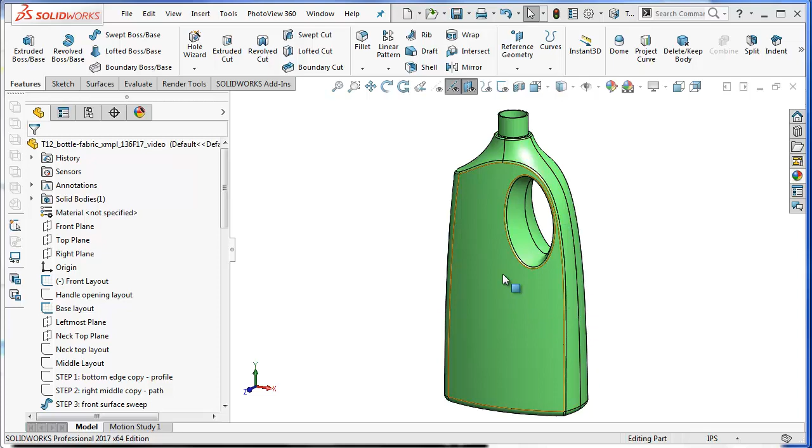What makes this particular bottle an interesting challenge is that a lot of bottles can be formed out of one loft or boundary, and then the rest of the details can be added or subtracted. This one has a side face and neck area that are all blended together as one contiguous surface, and then the front surface and left side wrap around as sort of a contiguous surface as well.

For this reason, we have to build all of the surfaces as separate panels and then knit them all together.

I'll begin the tutorial by showing you all of the layout sketches and planes I used that all the remaining features are based upon. I've rolled back the feature tree to the very first feature, and here we see the front layout. We see the edges of the bottle, the neck area, and the left edge. This edge here is slightly inboard of the outer edge, which represents the forward edge of the front face. This edge is a forward edge of the front face as well.

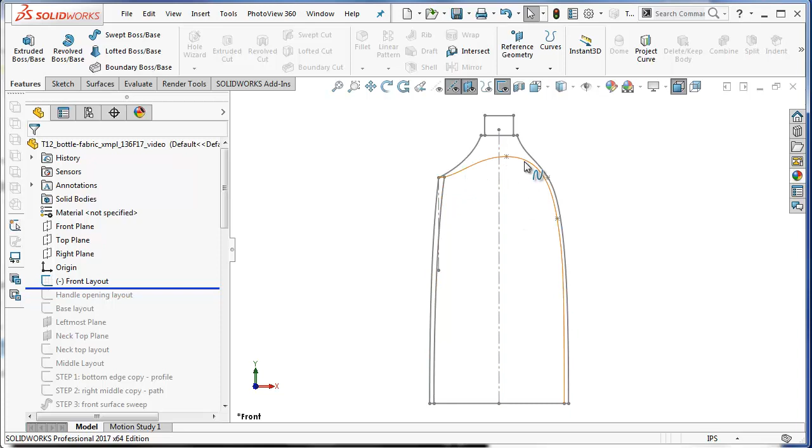The next layout sketch just shows the shape of the handle area, which is cut out of the bottle. And we have another layout which shows the shape of the base of the bottle.

Then I've added a plane to the left of the right plane, which I call the leftmost plane. A plane at the top in the neck area. And a little layout sketch that just represents the top circular shape of the neck area here. And then finally,

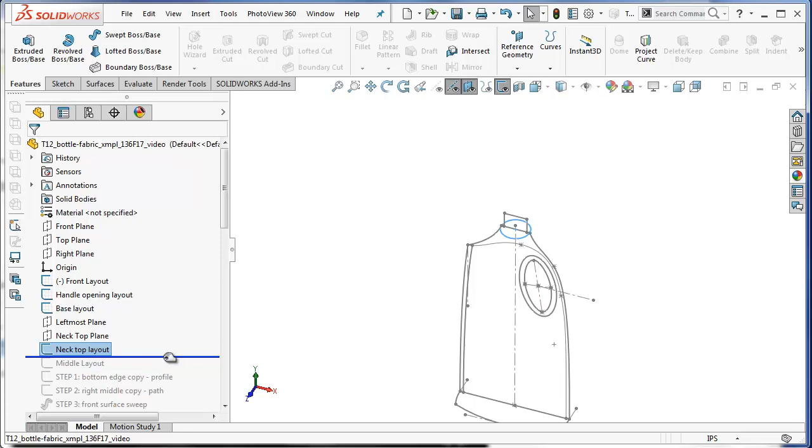I have a layout which is on the right plane, which represents the shape of the bottle right in the center or middle of the bottle.

I'm going to start the surfacing of the bottle by first creating the very front surface. This is going to be done by taking the bottom curve of the base and sweeping it along this middle curve. That will give us a nice gentle compound curve in this area.

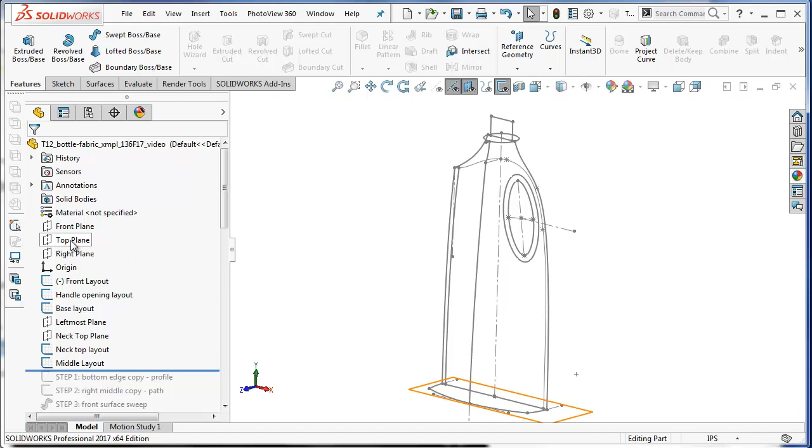So I start that by first making a sketch on the bottom plane, or actually the top plane, and then copying this curve into my sketch using convert entities. That's all I have to do here. I'll close the sketch, and that sketch will become the sweep profile.

The next sketch I need to make is the sweep path, which is going to be copying this curve into a new sketch. So on my right plane, I'll make a new sketch and just simply copy this curve from the layout sketch, and I'll finish the sketch.

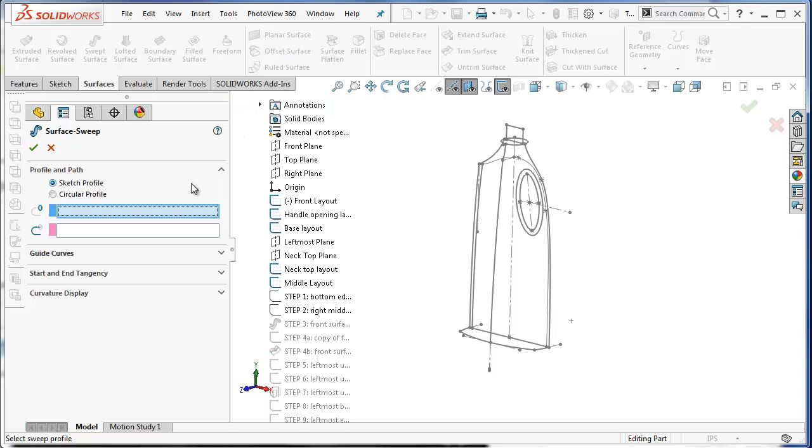Now I can make my surface sweep. So I'll choose the swept surface command, and I'll pick the two sketches that I just made off of the flyout menu. For my profile, I will select the first sketch that I made, and for the path, I will select the second sketch that I made. Here we see the profile, and we'll just go ahead and finish that command.

So here we see our very first surface. It's just a gentle compound surface, and I'll look at this from the front view. We see that it just fits in within the confines of what will become the front surface of our bottle.

It's actually not a bad idea when you copy this sketch down here to stretch it out just a little bit to either side, so that when you trim this surface, you'll get a good clean trim down at these corners. The next step will be to trim this surface so that it matches the shape of the front of the bottle.

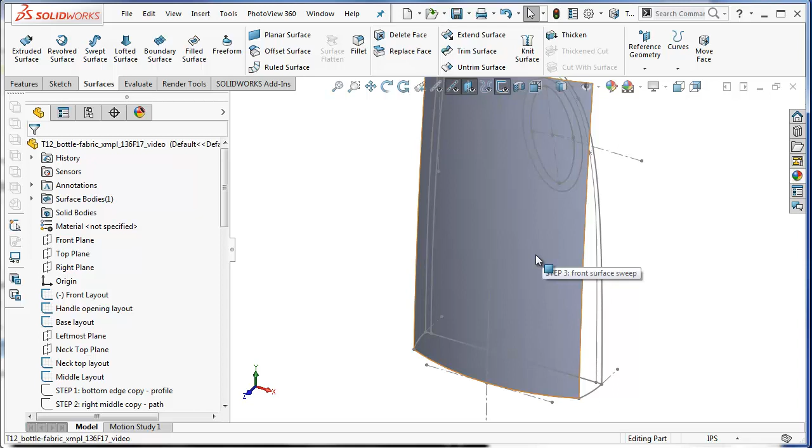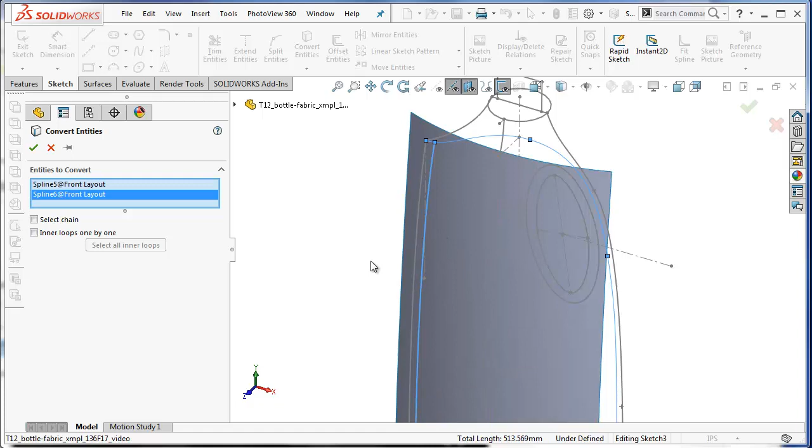To do that, I'm going to copy this edge here from my front layout, and I'll go to my front plane and make a new sketch. I'm using convert entities. I'll copy this edge and this edge from my layout sketch. And I need to just do a little trimming here, so I'll trim off this excess little piece.

Then I can go to my surfaces again and say trim surface. The sketch that I was working on should just automatically pop into the trim toolbox. I'm going to actually keep this middle section here, throwing away these outer bits. Finish the command. Now we've got a front surface that matches the shape of the bottle.

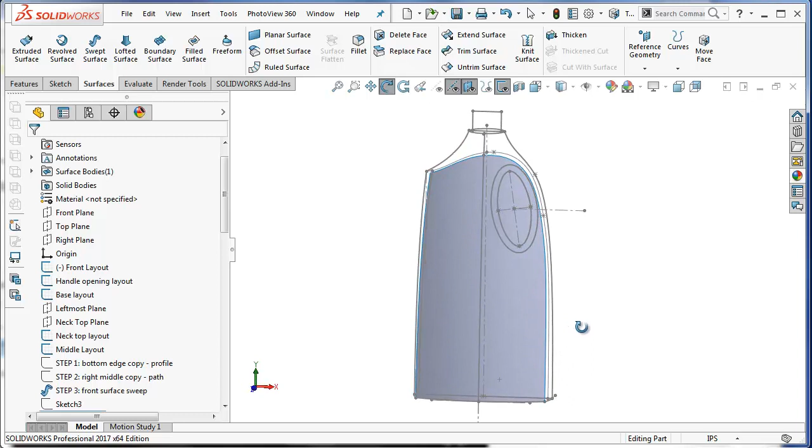Our next step is going to be to build the left side face of the bottle, and to do this we're going to use a boundary surface. Boundaries require 4 edges, and we are going to have 1, 2, 3, and the 4th edge will be here. The only problem is that we have nowhere in our layout sketches the curve that's going to connect this corner to this corner.

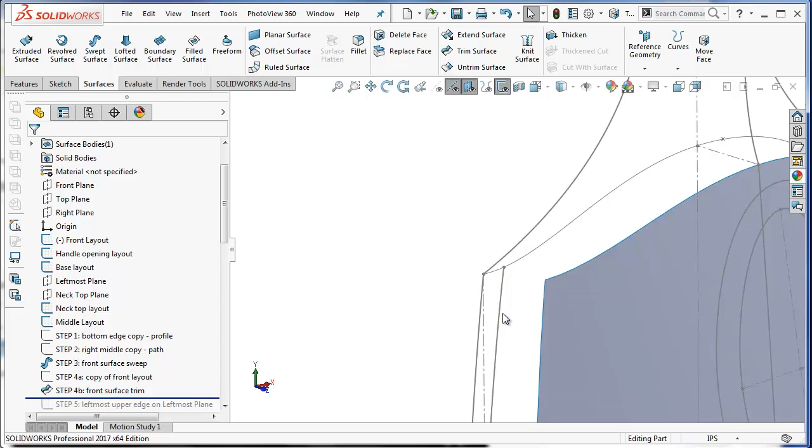That's a 3-dimensional curve. It's going to curve slightly upward in the left-hand view, and curve in this direction in the top view. So there's 2 ways to accomplish this before we make the boundary. One is to draw 2 curves in 2 different planes and project them together, or the other is to make a 3D sketch and just draw a 3-dimensional spline from this point to this point.

I'll show you the projected curve method first. I'll look at the left side of the bottle, and on the leftmost plane I will draw a sketch, and I'm going to draw a simple arc. It's going to start at this point, come off into this area, and I want to make sure that it's dished downward. And I'm going to add a construction line that is horizontal.

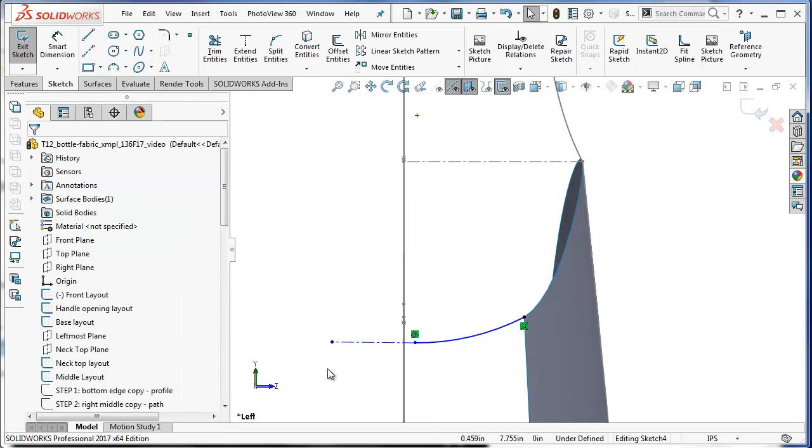These are automatically tangent to each other now, if they aren't, add a tangent relation. I'll rotate the view and make sure that this point and this point are coincident with each other. I also need to make sure that this tangent line is horizontal, which apparently it is not at the moment, so I'll just click on that and add a horizontal relation. Now we've seen our curve go to black, which means it's fully defined. You can see it has just a very subtle upward curve to it. So I'll close this sketch.

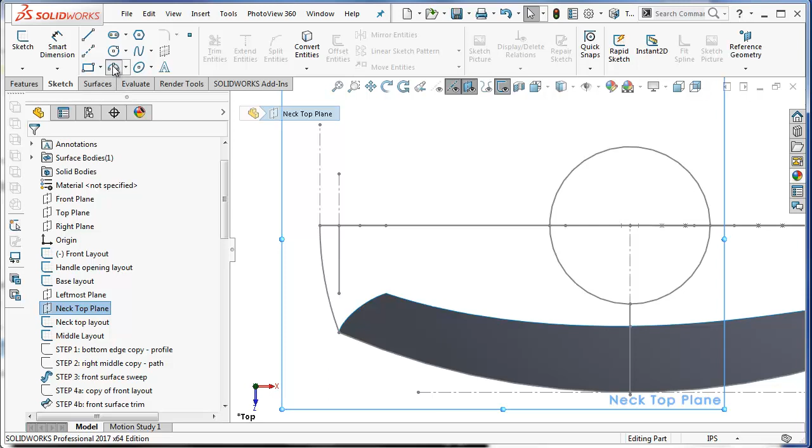Now I'll work on the top view of the very same element, which will be projected with this sketch. So looking at my top view, I'm going to sketch on my neck top plane, and once again I'm going to make a 3-point arc. I'm going to attach it to this point here, and I'll just sketch out in this area to start with. I'll make sure that this is bowing off to the left side.

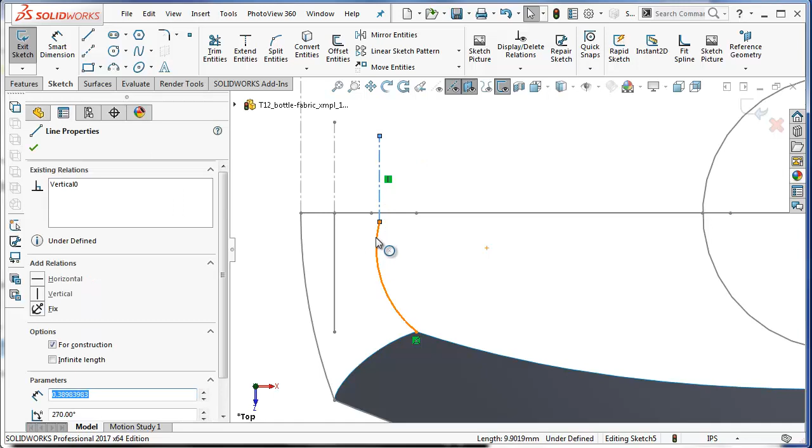I will make a vertical construction line that will be used for tangency with the curve, so I'll make these 2 tangent to each other. And I want to make this point and this point coincident.

Now if you're wondering why I'm adding these construction lines, it's because I want to make sure that when I make one half of the bottle and then mirror it to the other side, that I have a seamless blend between the original side of the bottle and its mirrored twin. To do that, I have to make sure that any curves that I draw that are going to go into the mirror plane, which is my front plane, have to go straight into that mirror plane or normal to it.

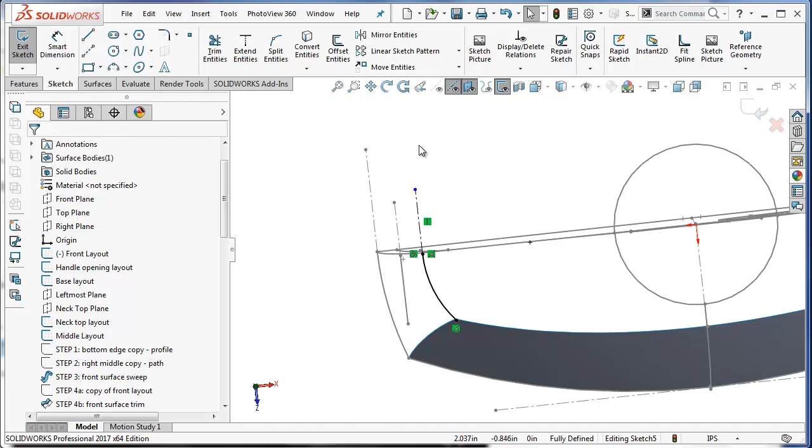So adding this construction line, which is vertical in this case, which is going normal to my front plane, will guarantee that when I make this projected curve with the curve I just previously drew, that the projected curve will also be going normal to the front plane, so that when I mirror this surface here, it will seamlessly blend with its twin over here. So I'll just finish this sketch now.

What I want to do is take the 2 sketches that I just drew, this one and this one, and make a projected sketch which will be a 3-dimensional sketch that will go from this point to this point in three-dimensional space. So to do that, I go to Insert, Curve, Projected. I use the Sketch on Sketch option, and I just click on these two sketches, and we see the highlight of these sketches.

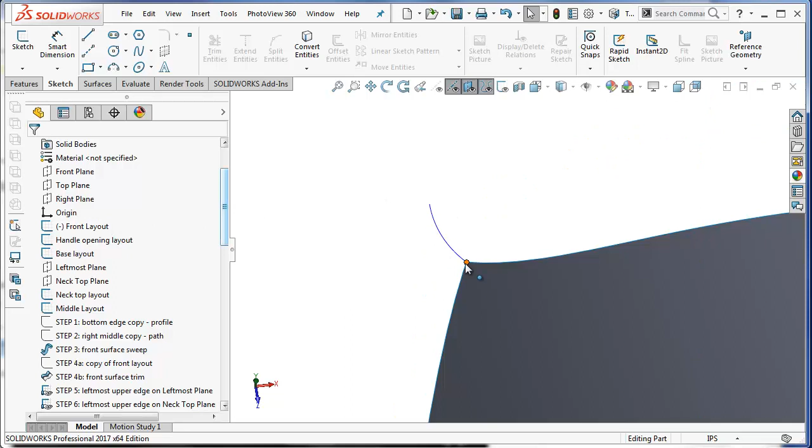Turning on my curves and turning off my sketches, now I can see what that curve looks like. So it's going from the front plane to this point in 3D space, and from the top view you see that it's curved like the top view sketch that I drew, and from the left side view we see that it's curved upward like the left side curve that I drew. I mentioned there was another way to do this, so I will just quickly demonstrate that.

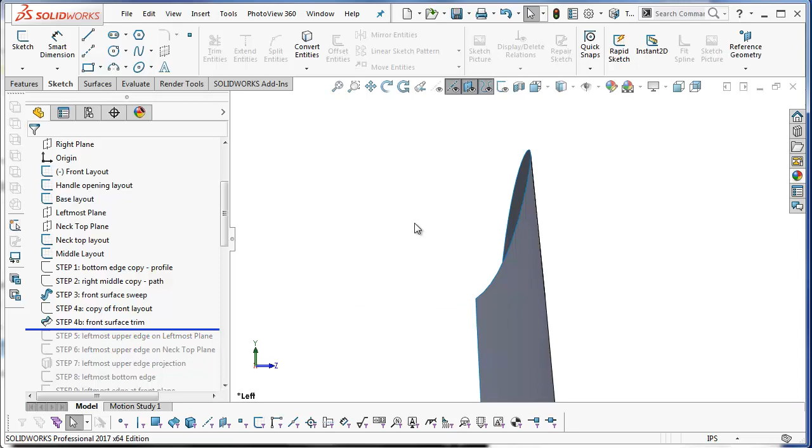I'll roll back my feature tree, turn my sketches back on, and I want to draw a three-dimensional curve in 3D space going from this point to this point. So going to my 3D sketches, I will first select Spline, and I'll click on this point in my layout sketch, and I want to make sure that I grab this point, which is the corner of my front surface. Hit Escape, and what I want to do is view this directly from the left side.

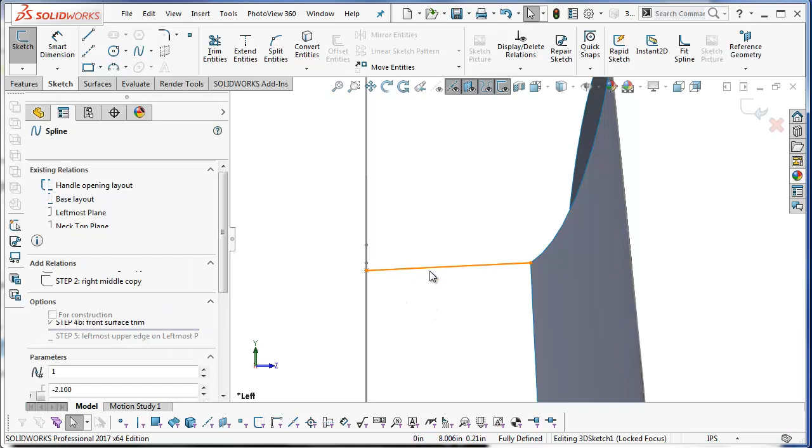When viewing this from the left side and making adjustments, I should not be affecting the shape of this curve when viewing it from the top view. So I'll click on this and grab one of the control handles, and make this control handle be along the Z direction, which is coming directly out of my front plane, also my mirror plane. Selecting along Z, we see a nice gentle upward curve like before, coming straight out of the mirror plane.

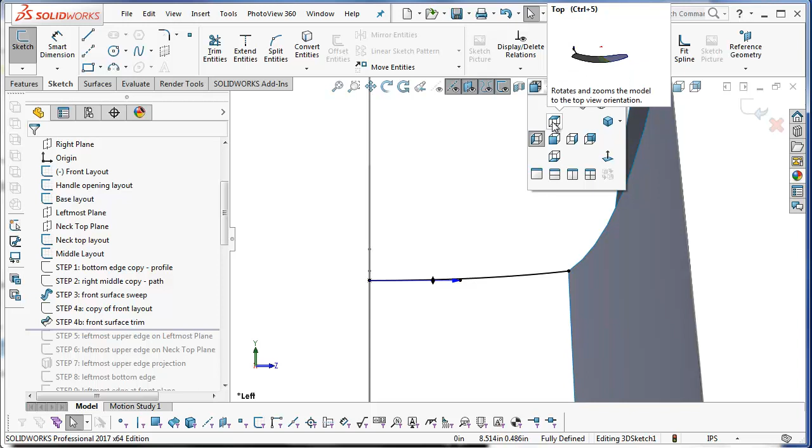Now looking at it from the top view, we see it's still coming straight out of the mirror plane, with a nice gentle curve going right to this point, bowing to the left like we need it to be. So I don't think I need to make any changes in this view at all. We'll look at this off axis to see what it looks like in 3 dimensions.

If I roll forward to the projected curve that I made, we see it's not too different from this 3D sketch. The two are practically on top of each other, so you might find that to be a less laborious way of making this curve from this point to this point.

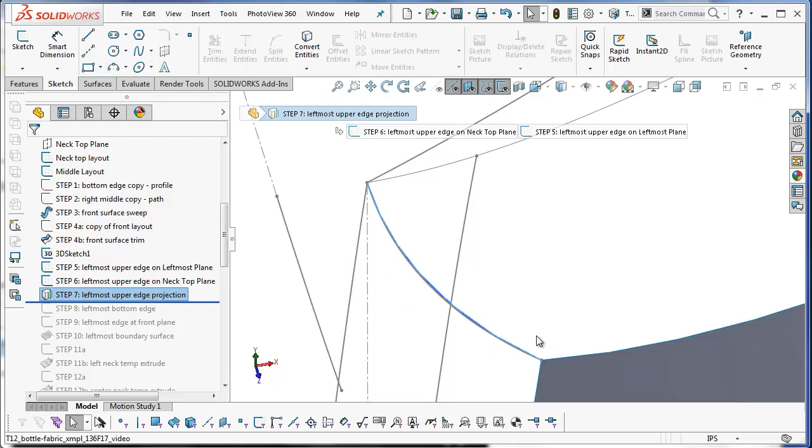I'm going to stick with the original projected sketch that I made for the rest of this tutorial. So now all we have to do to make our boundary is copy some elements from the layout sketches for the remaining 3 edges of the boundary. We need to copy this edge here and this edge here, but we don't actually have to copy this edge here - we can just attach our boundary directly to the edge of this surface we made earlier.

So selecting our top plane, we will make a new sketch, and just copy this edge from the base layout, then simply finish the sketch. Then on our front plane, we make a new sketch again, copy this edge from the front layout using convert entities, and finish the sketch.

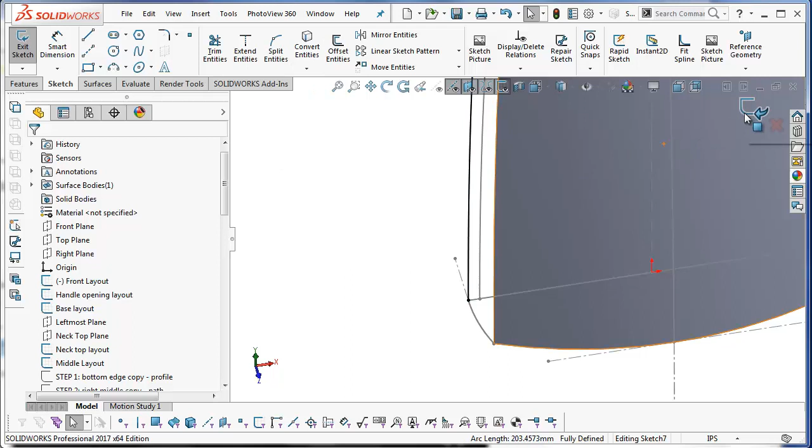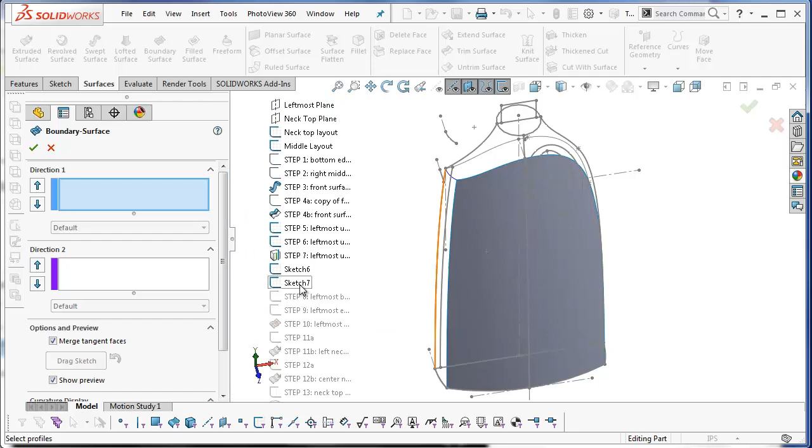Now we should have everything we need to make this boundary on this side. So I'll go to Surfaces, Boundary, and for direction 1 I will select the 2 long edges of the boundary. One of those edges is the sketch I just created; the other edge is this almost vertical edge of my front surface.

You notice that what's happened is that this has gotten twisted. That's because I'm trying to join a pink dot to a green dot when I want green dot to green dot. So all I have to do is untwist this by selecting either one of these in my direction 1 box, right click and say Flip Connectors. Now I've got pink dot to pink dot and green dot to green dot.

So now going the other direction, in direction 2, I'll activate that box. I will select this curve that I made earlier, and down at the bottom, I'll select the little sketch that I made just a few minutes ago.

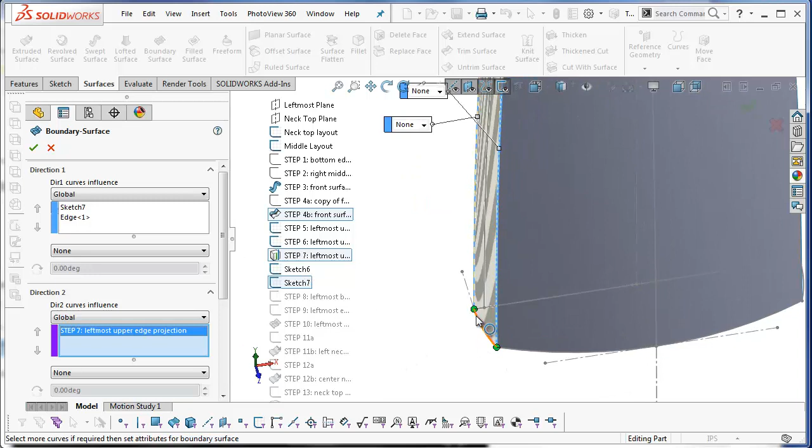Now what I want to make sure is that later when I mirror the bottle, this new surface is going to go normal to my mirror plane so that I get a smooth, seamless blend when I mirror the twin to this side. That means this edge right here, which is at the mirror plane, needs to be changed to normal to profile. And I finish the boundary.

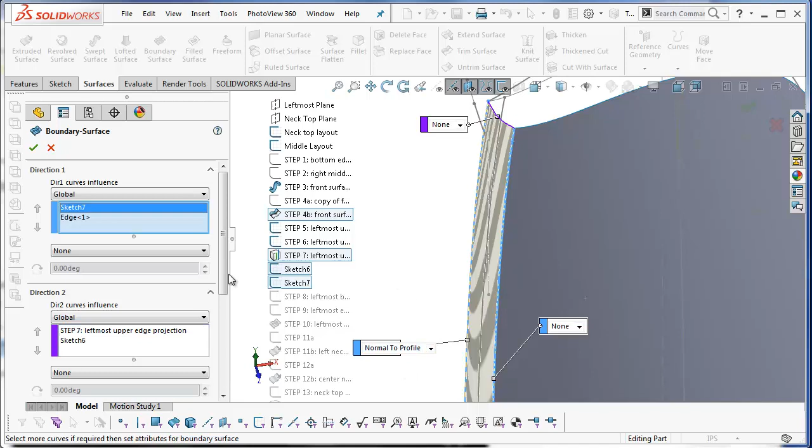This is what we have so far. The next step is going to be to build this neck area of the bottle. The neck area sort of starts on the left and blends all the way down to the right side of the bottle. If we try to build this as one giant surface that starts up here and falls down the side of the bottle, I think it's not going to be a very good looking surface.

So what we are going to do is build one surface here and later build another surface attached to it for the right hand side of the bottle and the right hand side of the neck. No matter how we slice the surface up, we're going to end up with an odd number of edges. So if we build this corner here, we will get 1, 2, 3, 4, 5 edges, which suggests we should be using a fill surface.

If we use a fill surface, we want to make sure that the fill surface is going normal to profile at the mirror plane. So this is the edge that's going to be at the mirror plane, and unfortunately there is no normal to profile option on fill surfaces. So what we have to do is extrude a temporary surface from this edge that we can attach the fill surface to.

We also need to copy 1/4 of the neck area here, and also we want to make sure that the fill surface is going normal to profile on the right hand plane of our bottle. And again, we don't have a normal to profile option, so what we have to do is copy this edge and temporarily extrude a surface in this direction that we can attach our fill surface to.

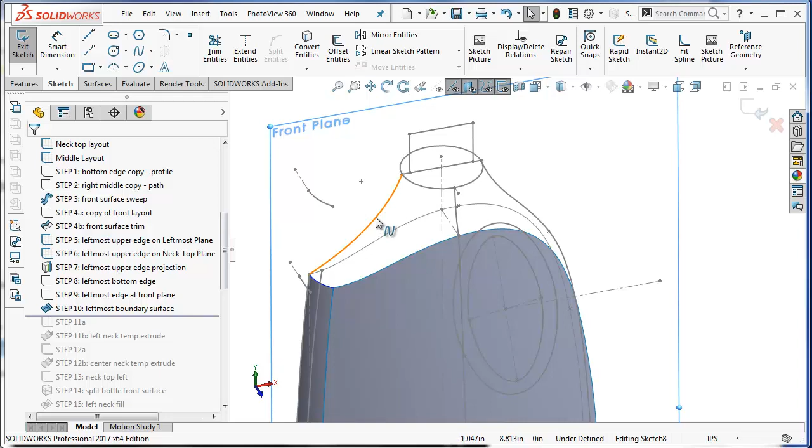So sketching on my front plane, I will copy this edge using convert entities, and then I will just extrude this in the -z direction. The extrude distance is not important, it's arbitrary, so I'll just leave it at 0.1 inches, and I'll flip the direction so that this is going off in the -z.

We have our temporary surface here. This is what we're going to be attaching one edge of the fill surface to. So our next step is going to be to build the temporary surface that's on the midline of the bottle, and we're going to attach the fill surface to that.

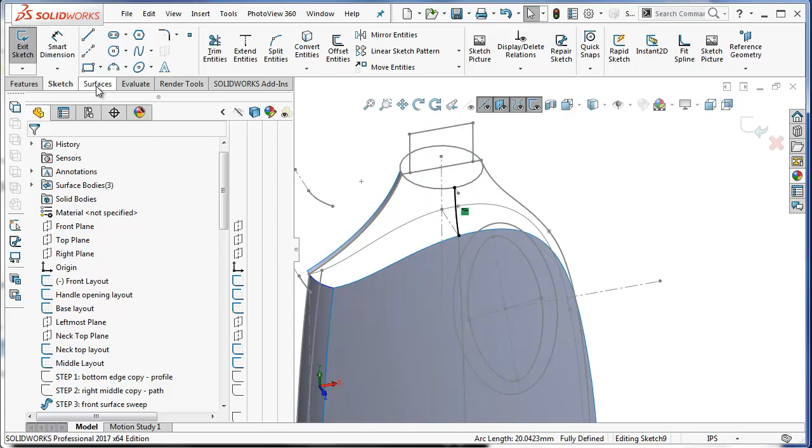So on our right plane, we make a new sketch, and all we have to do is copy this edge here, again using convert entities, surfaces, and extrude that, and we want to make sure that it's going off to the right. So now we have 4 of the 5 edges that we need. The last edge is just going to be this quadrant of the circle for the neck.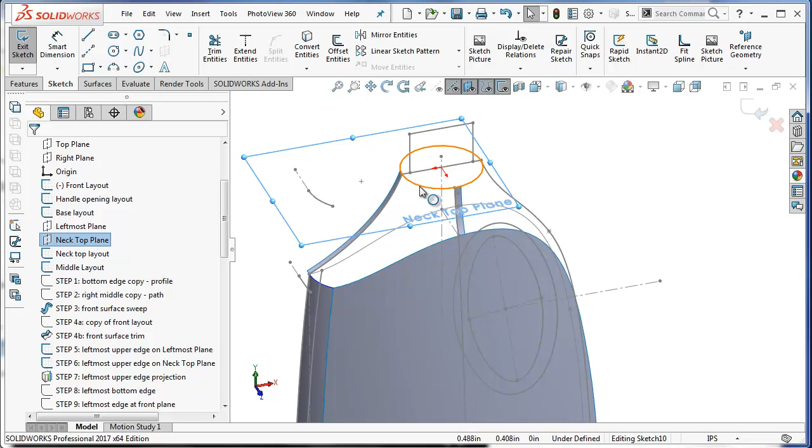So on our neck top plane, we will make a new sketch. We will copy the entire neck layout. We need to get just 1/4 of this, so what I'm going to do is draw a construction line from the origin out in this direction and make sure that this is going vertical, and another construction line going off to the left, making sure that this has a horizontal relation, and then I can just use my trim entities.

Turn off my sketches for a moment, and here we see we'll just get 1/4 of the original full circle. Now finish that sketch.

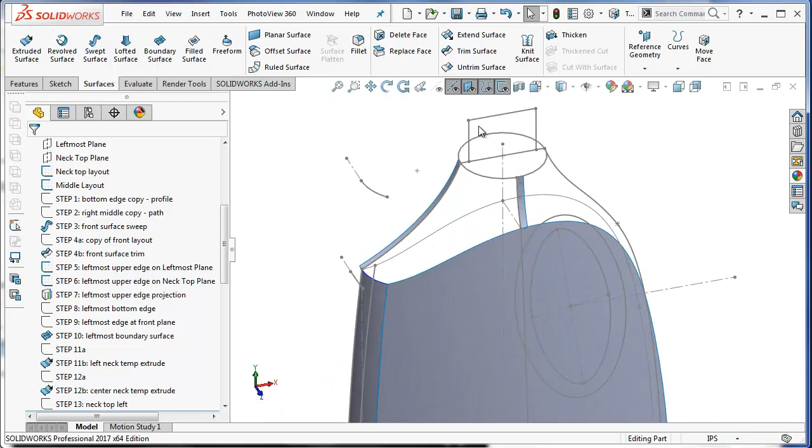Let's turn off our layout sketches and show the sketch that I just made. So we've got 1, 2, 3, 4, 5 edges.

The only trouble is that when you use the fill surface, you want the edges to all connect together from one end to the next. We're going to be using this edge of our front surface for part of the fill, but this edge is going past this edge here, and that can often cause the fill surface to fail. We need this edge to end right at this point.

So what we can do is split this front surface so that this edge ends right here. We'll do that using the right-hand plane. So we'll say Insert, Curve, Split Line. We're going to use the intersection option.

We're going to intersect the front surface with the right plane. So our first box is going to be the splitting surface, which is the right plane. The second box then will be the surface being split. Here we see a preview of the split line.

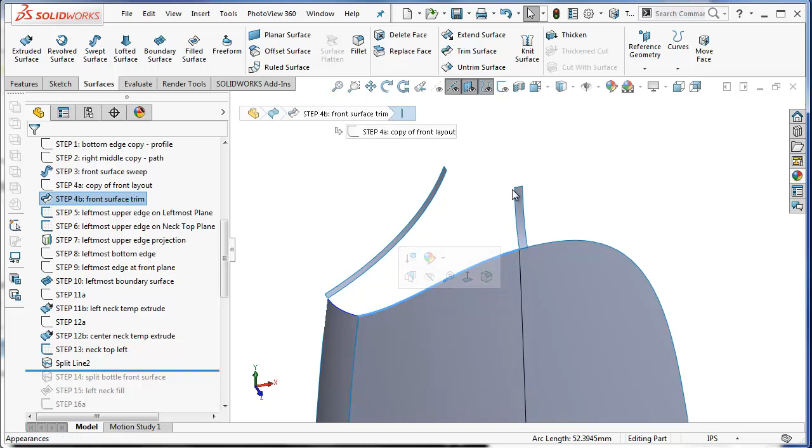Now if I click on this surface, you see the surface is split into two faces. And that means that this edge is going to end right at this edge, which is exactly what we need. We now have everything we need to make our first fill surface.

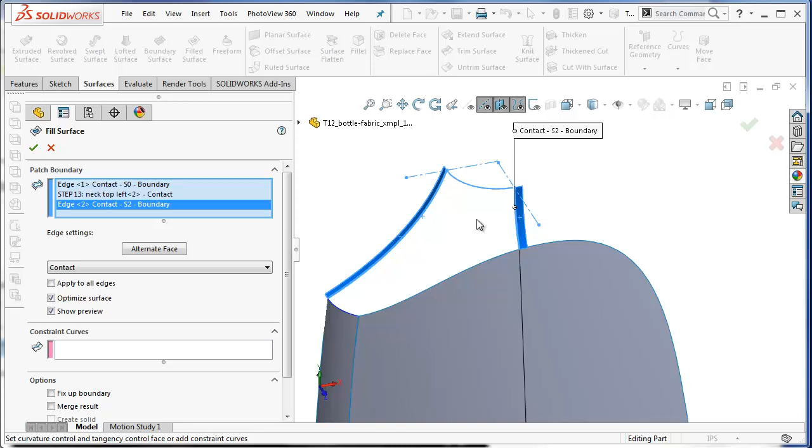I'll turn my sketches back on, and now I can go to Filled Surface, and my boundary is going to be this edge, this sketch, this edge, and finally this edge. Make sure that you have your curves turned off so that you're grabbing the edge of a surface rather than a curve or a sketch.

Now I need to make a few adjustments to my tangency controls. This edge here, we want the surface to go straight into the mirror plane. We've attached this edge of the fill to this temporary edge here, this one I'm highlighting, and we want to change this to tangent. That's the same in this case as going normal to profile with a boundary surface, because this is going tangent to a surface which is normal to the mirror plane.

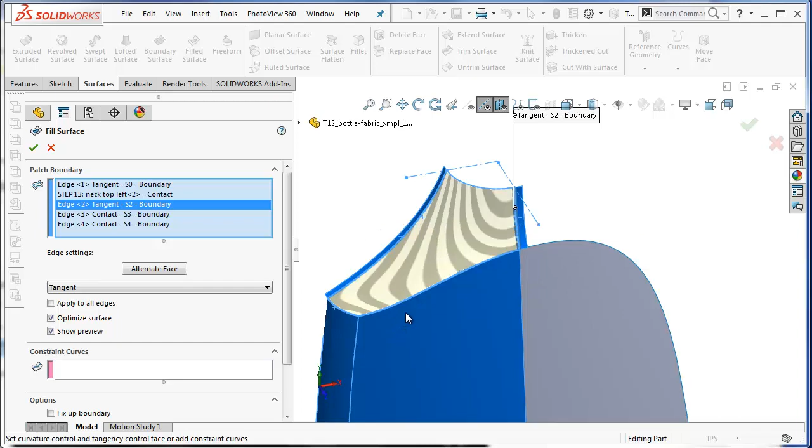This edge here can be contact. This edge here also we want to go normal to the mirror plane, which in this case is the right-hand plane, so I'll change this to tangent. We see some subtle changes to the surface in the zebra stripes, and this edge here can remain as contact. There is our first fill surface.

Now I'm going to hide this temporary surface. I don't actually need it anymore. And now we are ready to build the right-hand surface of the bottle. That's going to fill in this area here from the left side of the neck all the way down to the right-hand side of the bottle. This is again going to be a 1, 2, 3, 4, 5-sided surface, which means that once again we need to use a fill surface.

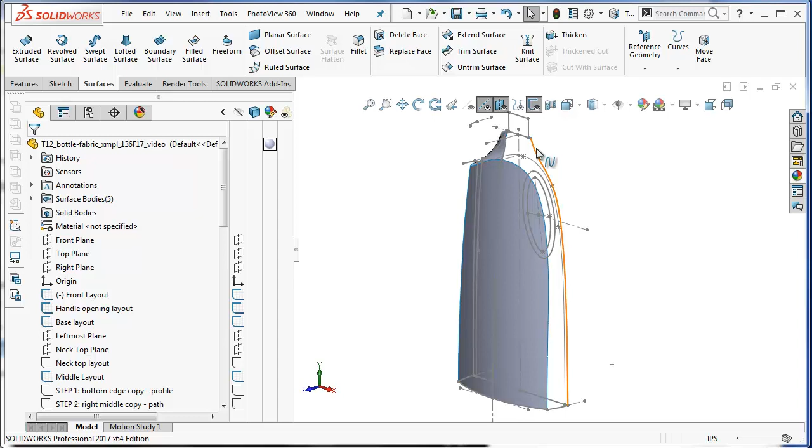The only additional temporary surface that we need is going to be on this edge here where the mirror plane is located. We don't need to build a temporary surface here because we're going to attach this new surface directly to the fill surface that we just created.

So making a sketch on our front plane, I will just copy this edge here from the front layout, and I will extrude this an arbitrary dimension. I want this to go in the negative Z direction, so I'll just flip my direction 1. 0.1 inches is fine, and just finish that surface.

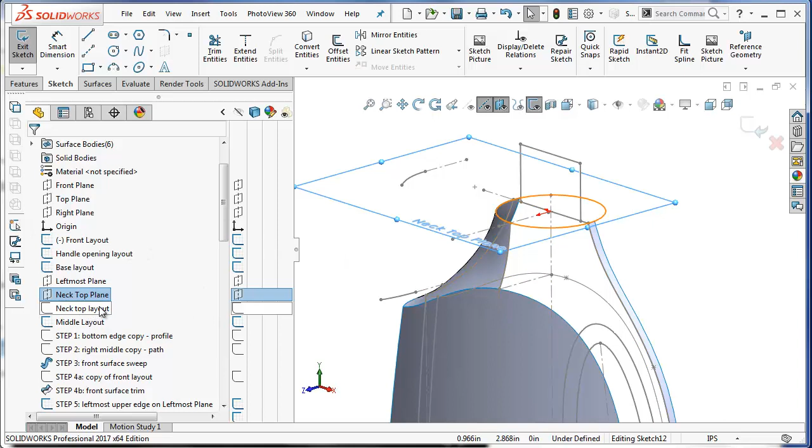I also have to make this quadrant of the neck area, just like I did before. So on my neck top plane, I will copy the neck top layout. I'll just do it straight from the feature tree here. So I will convert entities. I once again get a full circle here.

And again, I want to add a horizontal line here and a vertical line here. Turn off my sketches. I'm going to just utilize this quadrant here with the trim entities, and I'll trim away this portion here.

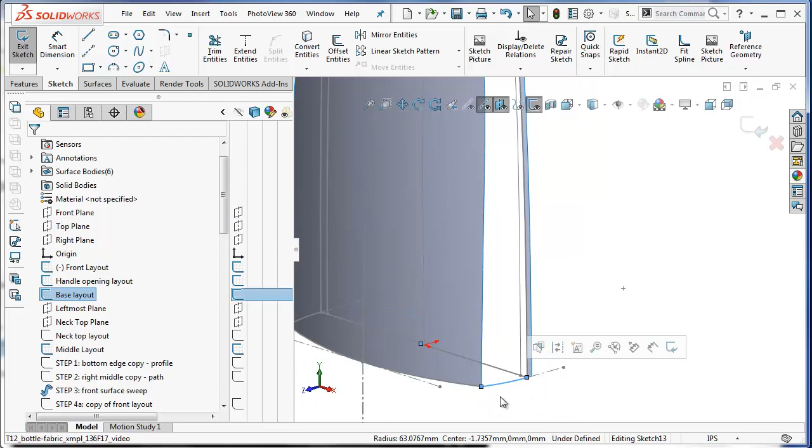The last thing I need is just a sketch for this bottom corner of the bottle. So again, turning on my sketches and looking at my base layout, I will make a sketch on my top plane and just copy this entity here, convert entities, close the sketch.

Now we've got everything we need to make this fill surface. I'm going to hide my front layout, and I'm going to make sure that this sketch here is activated. And we will now make our fill surface.

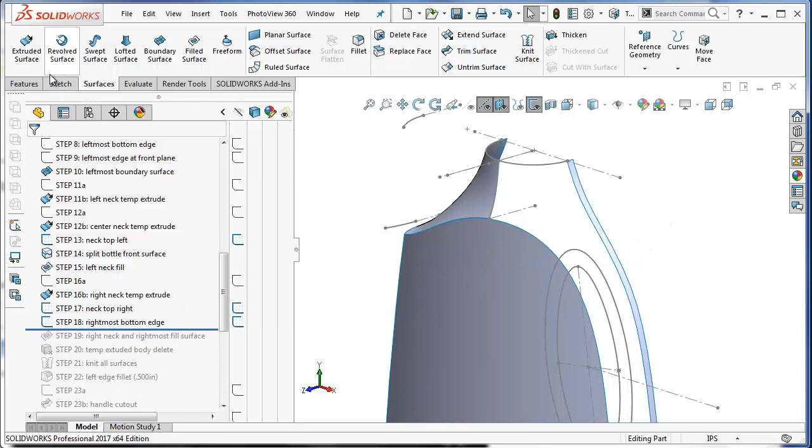I'll click this edge here, this quadrant of the neck. This edge of the previous fill surface I made. So you might want to turn off your sketches to make sure you're grabbing the edge of the fill surface and not a sketch. This edge here that was part of the split front face, so you see this edge is ending right here.

And then down below, I'll grab the sketch that I just copied here. So I will go to my flyout menu to get that.

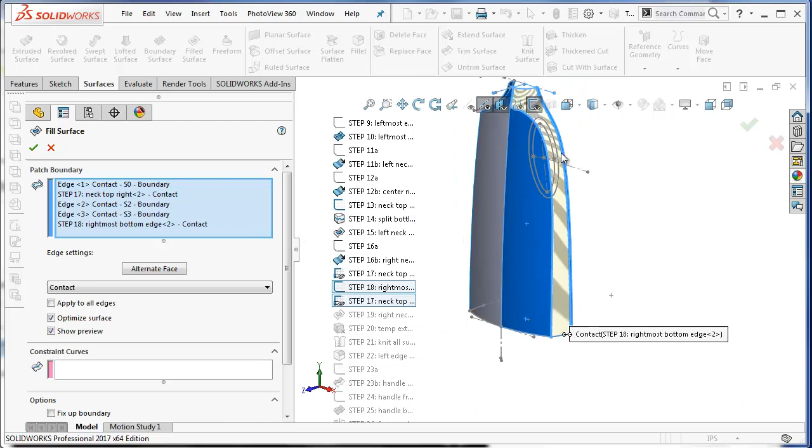Before I finish, I want to make sure that this fill surface is going tangent to this temporary surface, which will make it normal to my front plane, which is also my mirror plane. So that's this edge here. Change that to tangent.

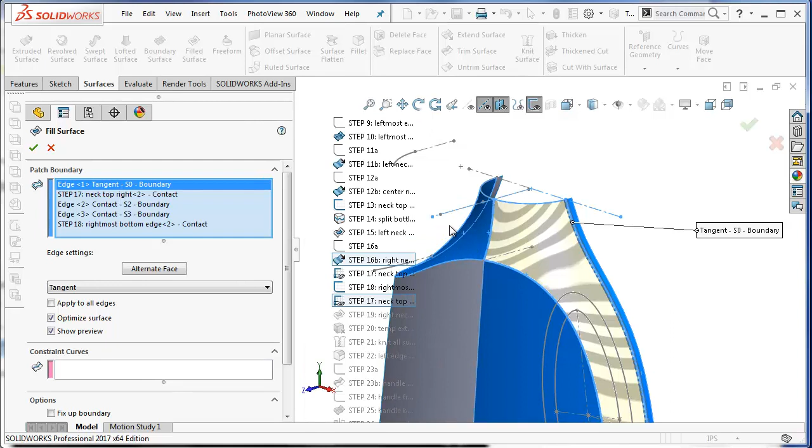And I want this smoothly blending to the left side fill surface here, so I can try a tangent or I can try a curvature. I'm going to try a curvature. That's this edge right here. And I'll say curvature, and it seems like it's going to work, so I will have a nice blend here.

Finish that. Let's turn off our sketches. And now we can see how this is nicely blended in with the neck, and if I turn on my zebra stripes, we see that there are smooth zebra stripes going through this joined edge here. Actually, common edge would be a better term to use here. These are not joined or knitted together just yet.

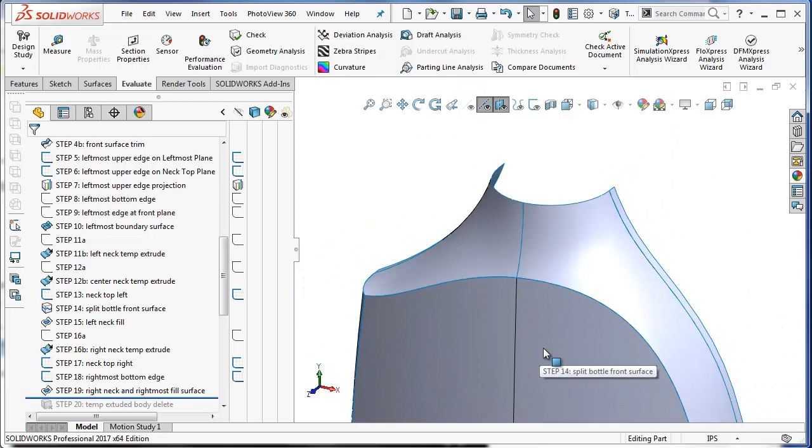So I'm going to do a little bit of housekeeping right now. You might recall that we've used 3 temporary surfaces which no longer are needed. So I can just go into my surface bodies.

And I know this is a temporary surface here, so I'll just find that surface in my surface bodies. That's here. Right click, delete, keep body. I'll make sure that delete bodies is active.

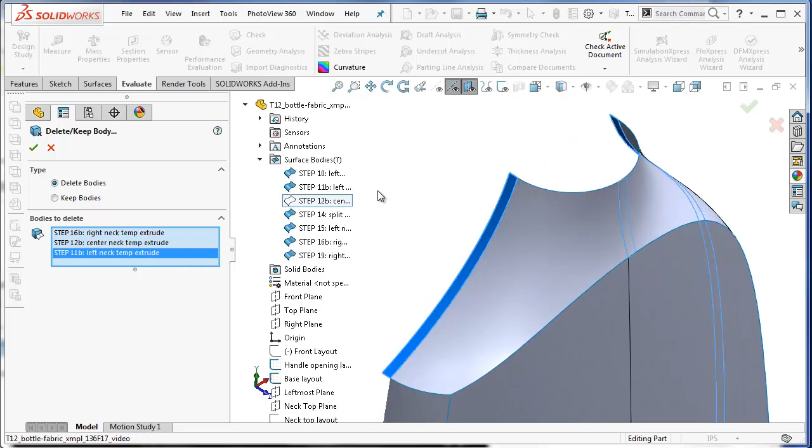I'll open the surface bodies again in the flyout menu, and I'll select this surface which had been hidden to add it to the list. I'll get rid of this body too. Actually, I can just go ahead and select it right from the graphics area. So I've selected 3 bodies to be deleted, check mark. Those are now out of my model.

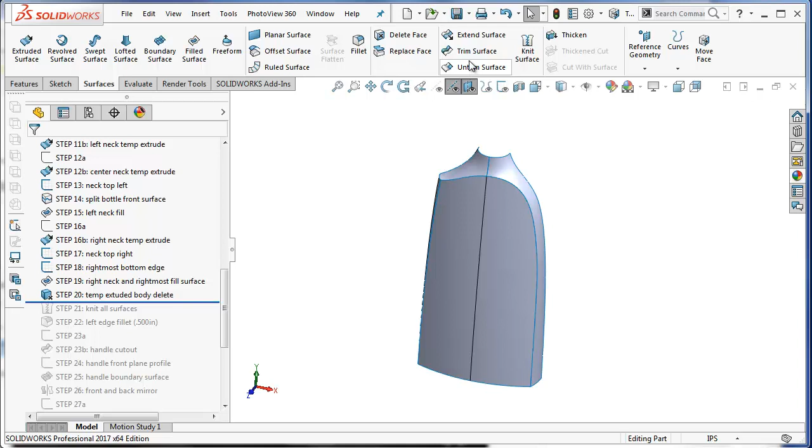So we've gotten most of the hard stuff out of the way. Now we can knit all the surfaces together that we've created thus far. Going into surfaces, knit, and we've got 1, 2, 3, 4 surfaces to knit together. These are now a single surface body, and you can tell they're knitted because the lines which had been blue where they were meeting are now black. And if we go up into our surface body folder, we see there's just 1 body now.

Now we have a fillet to add on to this edge. So features, fillet, and that will be 1/2 inch in radius. Just add that right to the edge there, and we're done.

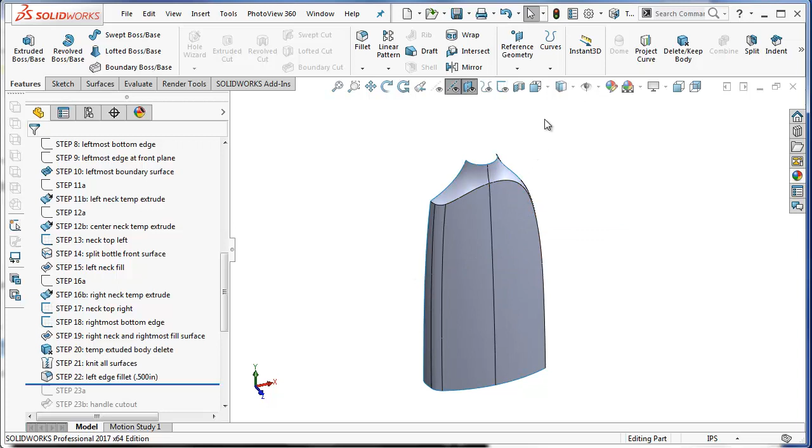The next thing we're going to work on is the cutout for the handle. So on the front view, turn on my layout sketches again, and we want to cut out the handle to this larger oval size. So front plane, sketch, we'll just copy the larger oval, and then surfaces, trim, and I will just keep all this outer section here, or I can say remove selections and select the middle.

So there's the opening for my handle, and then I need to make a surface which is going to go from the smaller oval out to the edges of the opening. The handle surface will just be a boundary surface which will go from one oval to the outer oval.

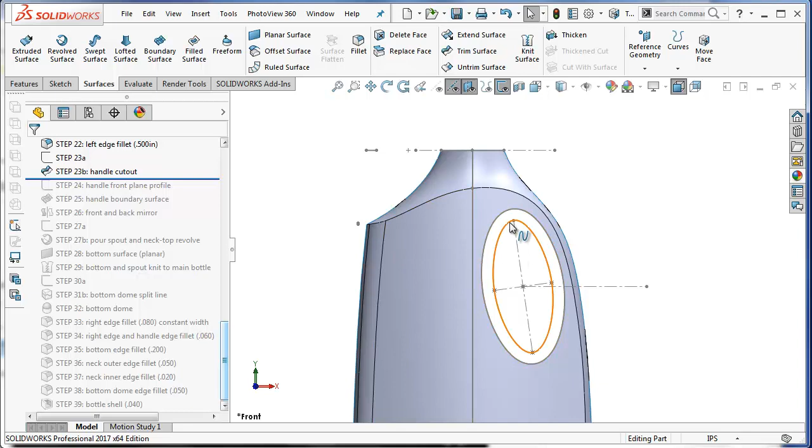So I need to copy this inner oval here onto my front plane. Grab that, convert entities, and finish the sketch.

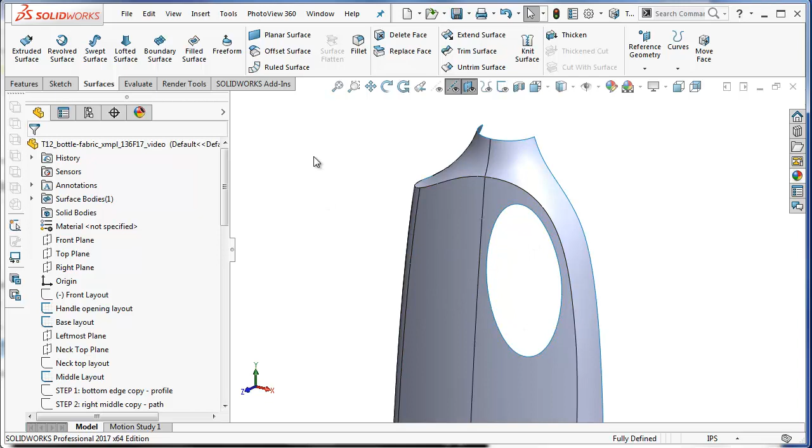So now to make my surface here, this is going to be a boundary which just has only direction 1, no direction 2 curves. So I'll go to boundary. I will select this sketch that we just made that's located on the front plane and this edge of the cutout in the front surface. And we see it's badly twisted around. We want to make sure that the green dots are in alignment with each other.

So I'll just shift this dot up a little bit and bring this dot down a little bit, which doesn't seem to have helped. That's because this dot's on the wrong side, so I'll drag this over onto this side. And it still looks twisted up, so probably all I have to do is just say flip connectors. And now we see we have a green dot going to a green dot.

We want this surface to have a seamless blend when it gets mirrored to the other side of the bottle. What that means is this surface needs to be going normal to the mirror plane. To do that, we will set this edge here to normal to profile, and that's going to give a little bit of curvature to the surface in this direction also.

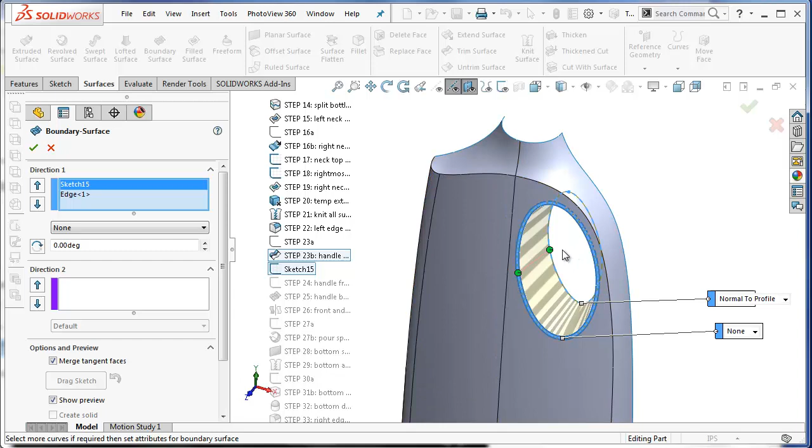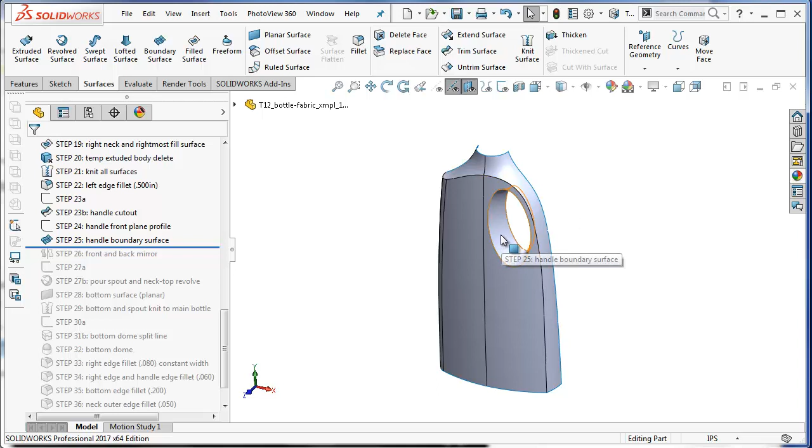So let's see what we've got so far. We've got the front face of the bottle, all the front features and the cutout handle and the handle itself. And now I'm ready to make the mirror image of the bottle to complete the back half. I could knit the handle to the front face of the bottle first, but I'm going to be doing some other knitting later on, so I'll just wait to do that.

So I will use the front plane as my mirror plane. Going up to the top here, we'll say front plane, and under features we will go to mirror, and I want to make sure I'm using the bodies to mirror box. I will mirror this body here, the main body of the bottle, and the handle body.

I want to check the option knit surfaces. So when a copy of each surface is made, it will be knitted to its copy. Here we see that the main front surfaces of the bottle are knitted to the mirrored back half, and this mirrored portion of the handle is knitted to the front portion. However, the handle is not knitted to the main body.

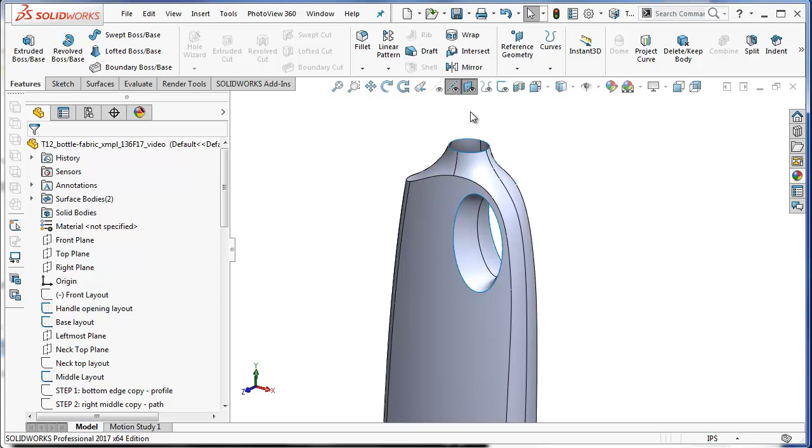Now we are going to make the pour spout at the top. I'll go to my front view, turn my sketches back on, and this is the portion of the pour spout, which is a simple revolve. On my front plane, I'll draw a new sketch, and I'm going to draw a construction line running right along the right hand plane, then copy these three lines using convert entities.

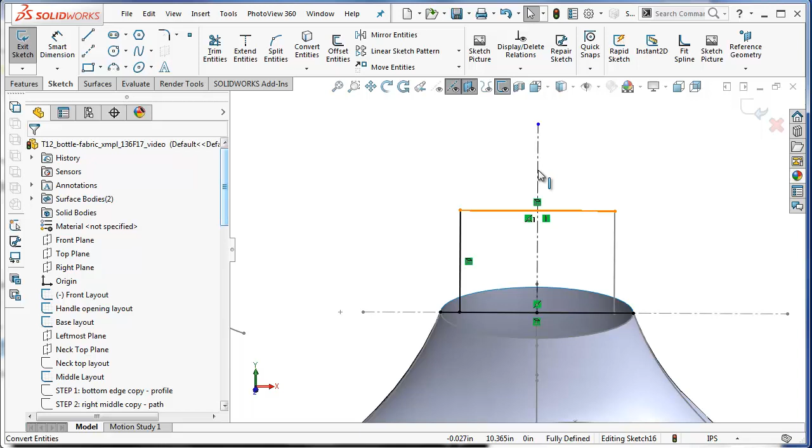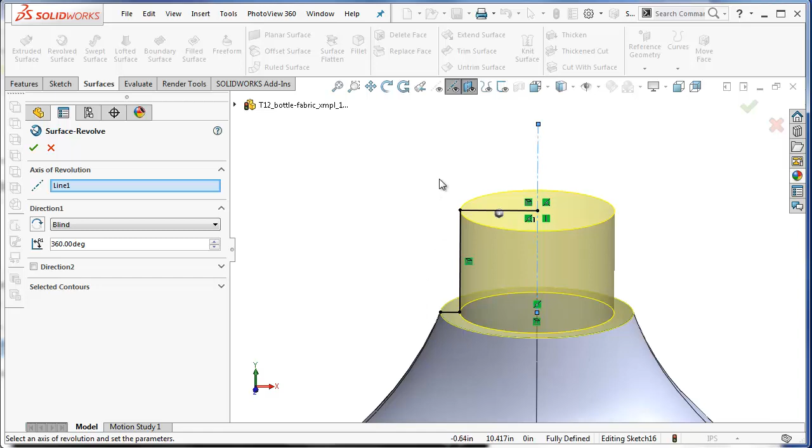I need to trim these so that I only get half of the pour spout, which is going to be revolved around this construction line. So I will trim away this portion here and these portions here, leaving me just with this section, which I can now revolve. Going to my surfaces, I simply say revolve surface, and that gives me the entire pour spout.

Now we need to make only one more surface in order to make a watertight solid object, and that's going to be the bottom. We can do that just by making a planar surface that will fill in this bottom area.

Going to the planar surface command, all I have to do is click on all the blue edges, 1, 2, 3, 4, 5, 6, 7, and 8. You'll get the preview of the planar surface once you've completed a contiguous perimeter, and now we have our bottom.

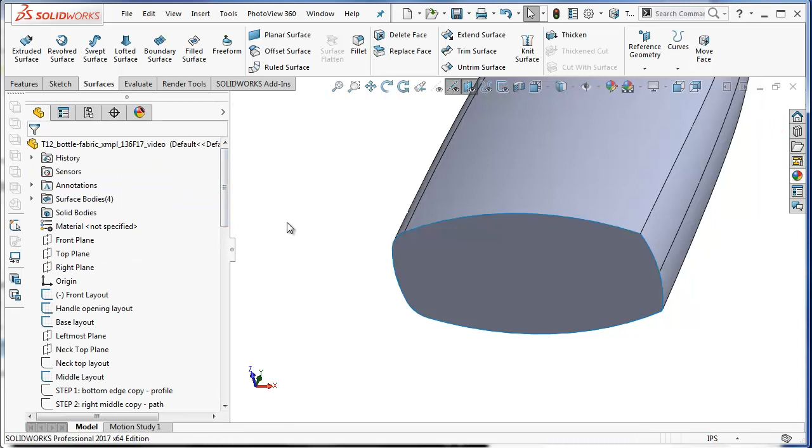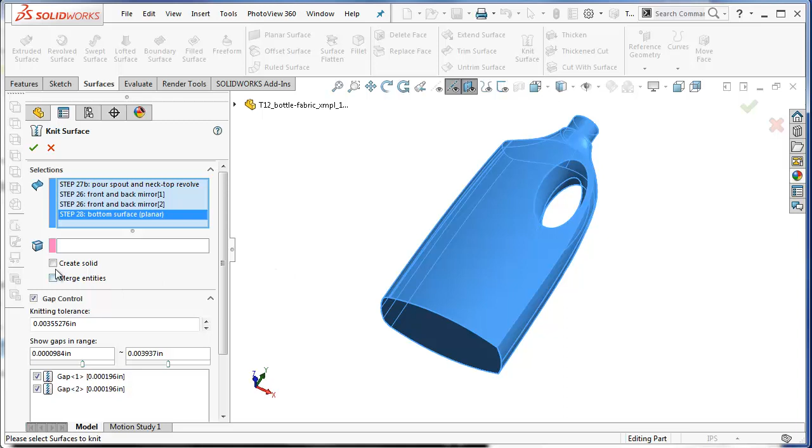Now we can knit all of our surfaces together and create a solid form. Going to knit surface, a total of 4 surfaces are to be knitted together. You'll probably get this gap result in the bottom here, so just leave these checked. We also want to create a solid object, so we check create solid and hit the check mark.

Now you might be wondering why we decided to make this a solid, and the main reason is that we are going to make a dent in the bottom using the dome tool, and the dome tool can only be used with solid objects. We give you a preview of what the dent is going to look like.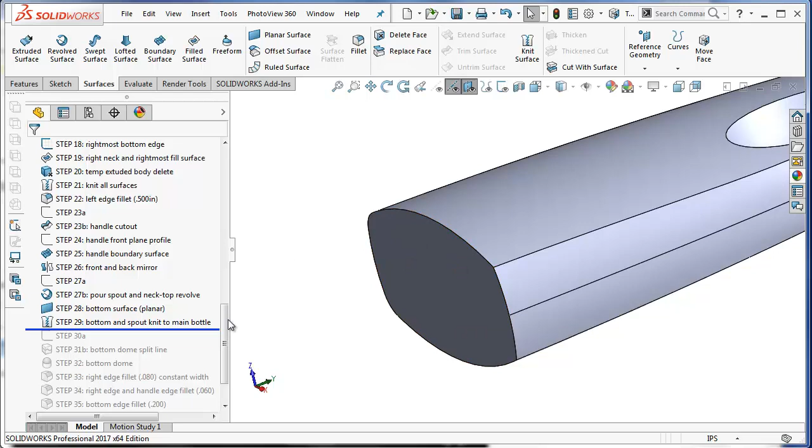I'm going to make this sketch by copying some elements from my bottom or base layout. On my top plane, I will make a new sketch, and turn on my layout sketches again. I'm going to take these three lines from my base layout and offset them inward, holding my control key down, clicking on each, and going to offset entities. I'm going to offset this inward by 0.3 inches.

Then I'm going to draw a construction line going from my origin out to the right. Doesn't matter if it's the right or left, but the important thing is the construction line is horizontal, and I can use that to mirror these elements. So I'll just grab all of these now and mirror entities, and that gives me both the front and the back half of what will become the dent.

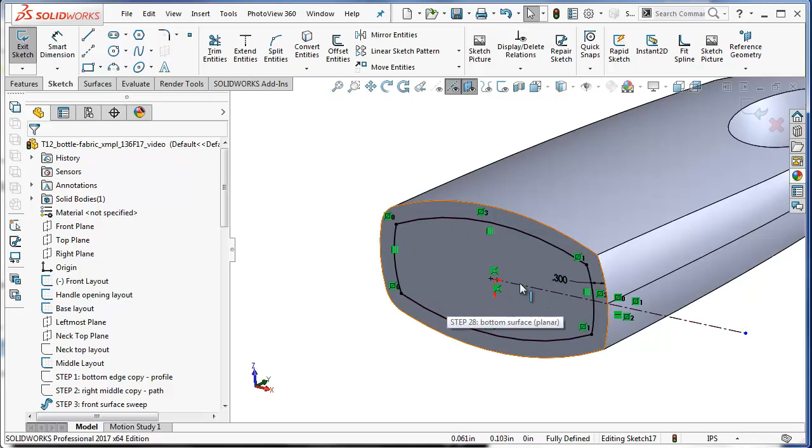I want some rounded corners in here, so I will use my radius tool and make a 0.2 inch radius at each corner. This is going to be the shape of the perimeter of the dent.

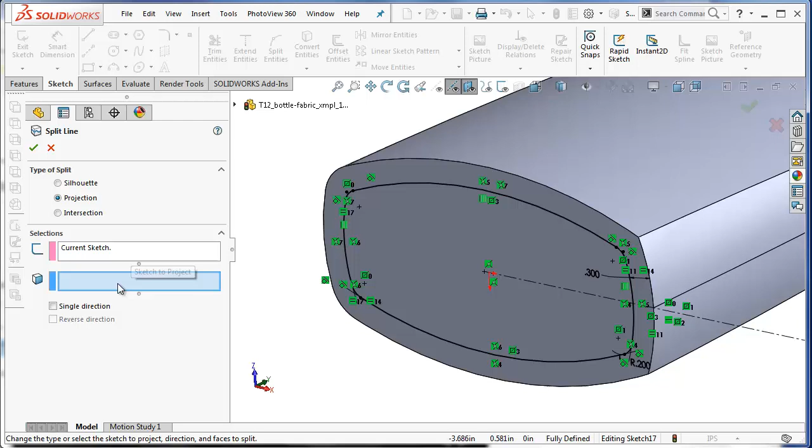Now I'm going to use this perimeter to split this bottom into two faces. So I just go into Insert, Curve, Split Line. We're going to use the projection option. The current sketch has already popped into the top box, and in the bottom box we are going to select this bottom face of our solid bottle. Now we see the bottom surface is split into two separate faces.

So we've got a solid body, we've got a split face, and we're now ready to use the dome tool. I have it on my command manager. You might have to search for that tool using the command search.

I'm just going to click on this surface here, and tell it that I want it to dent inward by 0.3 inches. You see right now it's bulging outward, so I just flip the direction, and that is pushing inward.

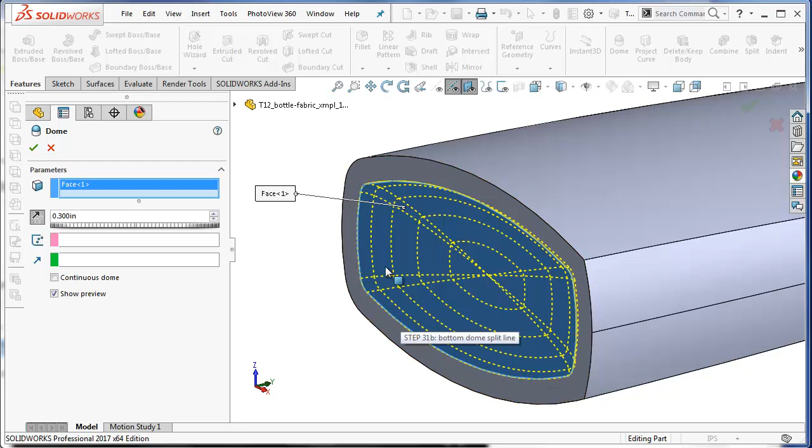You see that it's got these smooth curves that are going to blend in with the outer surface. That's because the continuous dome option is checked at the moment. If it is checked, uncheck it, because what we want is a sharp edge around the perimeter here with a very definite dome shape which is separate from this outer area.

So that's what my dome looks like. You're going to have these little splits where the corner fillets are, and a very definite edge here. We want that edge because we're going to add a fillet to it later on.

The rest of this tutorial goes rather quickly because all we have to do now is fillet some edges and then finally shell the bottle.

The first fillet we want to add runs along this edge, which starts in front, wraps over the top, and then ends up dropping down into the back. We want to use a constant width fillet here, because this fillet is going between two surfaces that change their angle with respect to each other quite a bit.

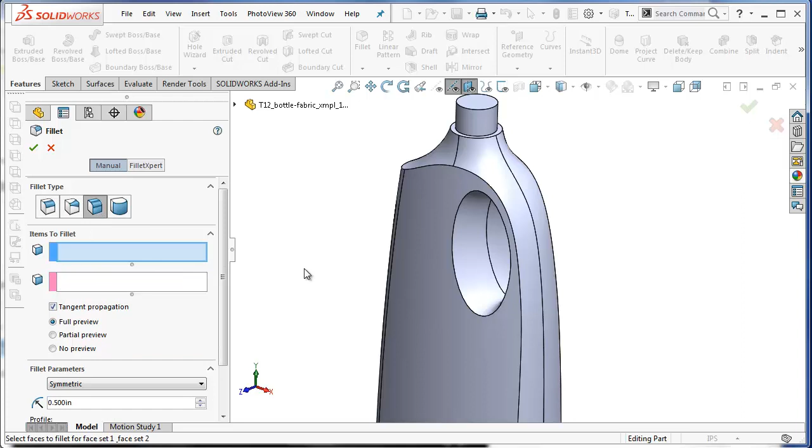So we'll go to fillet, use the face fillet option, and first select all the faces that represent the front, the sides, and the back. So that will be this face, these side faces, and the rear face as the group 1 faces.

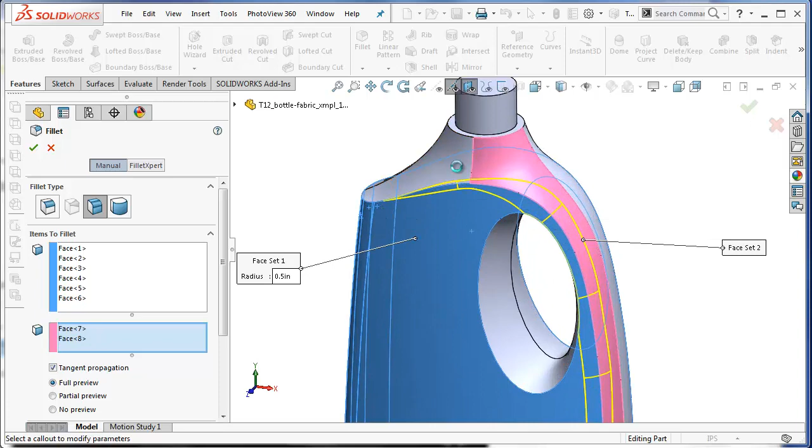And then for group 2, we will select this face here. You see that this is not making its way all the way around, so we'll also include this face, and finally this face.

We will change that radius to be about 0.08 inches. And finally, what we will do is change the option to constant width so that the fillet will appear to be the same width wrapping around the entire length of its travel.

Now we'll add some fillets to the handle edges. This can just be a normal edge fillet, and we'll use a fillet radius of 0.06 and select this edge and the mirrored edge back here.

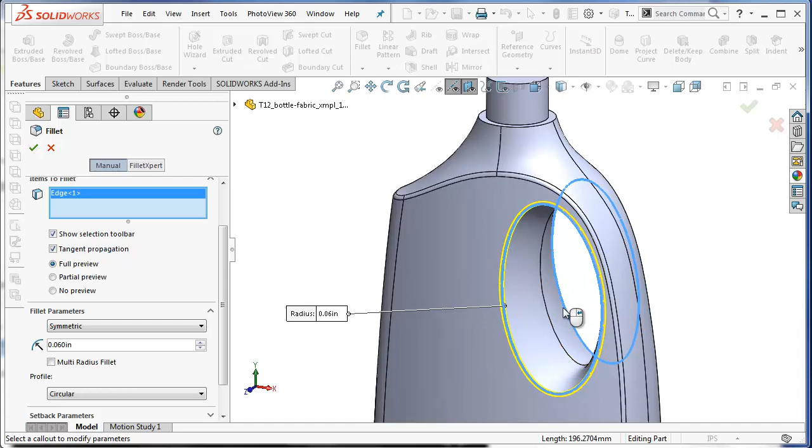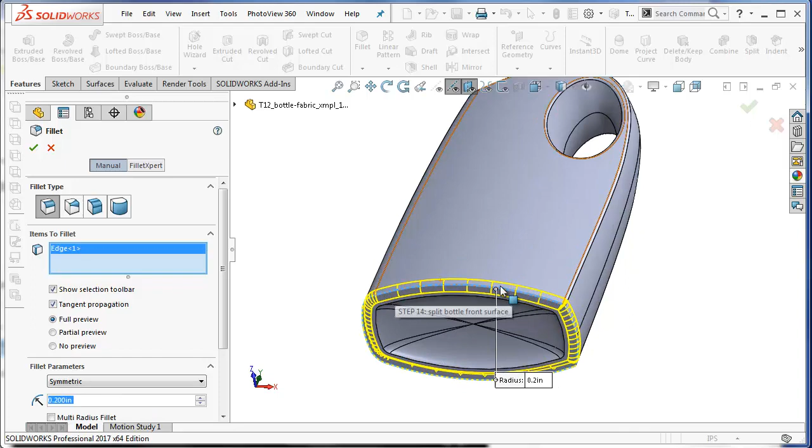Next is a fillet at the base of the bottle. Again, this will just be a normal type of fillet using the edge, and we will use a radius of 0.2 and just click on an edge, and tangent propagation should just carry it all the way around the perimeter.

Going back up to the neck area, we'll add a fillet to this edge here. We'll make this 0.05, click on this edge, and it should go all the way around automatically. If it doesn't, click on the extra pieces of the edge to make sure that it completes the full perimeter.

One last edge to fillet up in the neck area. This will be a very small fillet, 0.02, clicking around this perimeter here.

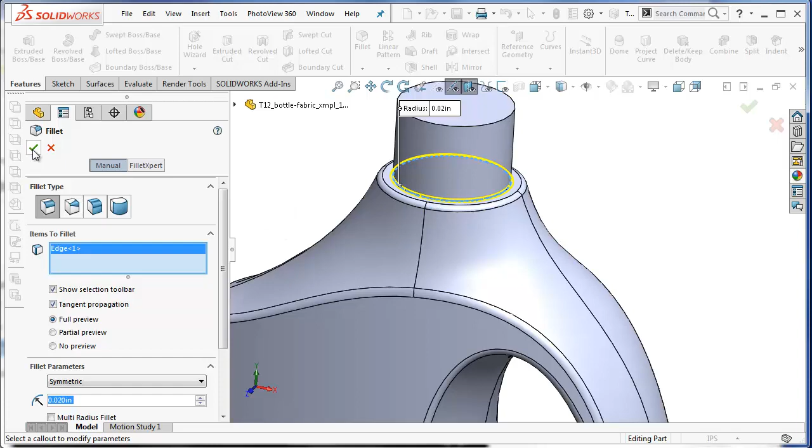And finally, we only have one last fillet to make, and that's going to be in the domed area. We want to fillet this edge here. This again will just be a normal edge fillet, 0.02, and tangent propagation should carry it all the way around.

We are now ready for the final step, which is to shell this solid bottle. The only open end of the bottle is up here at the pour spout, and we're going to use a thickness which is less than any of the outer edge fillet radii that we used, and that's going to be 0.04 inches. All of our outer edge fillets were 0.04 or greater, so now we just have to go to our shell command. We will use the thickness of 0.04.

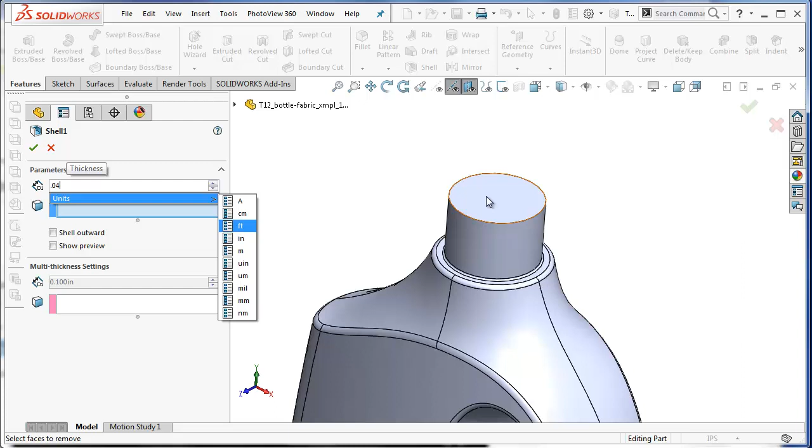We'll click on the surface that is supposed to be open when we shell it. That's the top here. Click the check mark, and now we have a completely shelled out bottle.

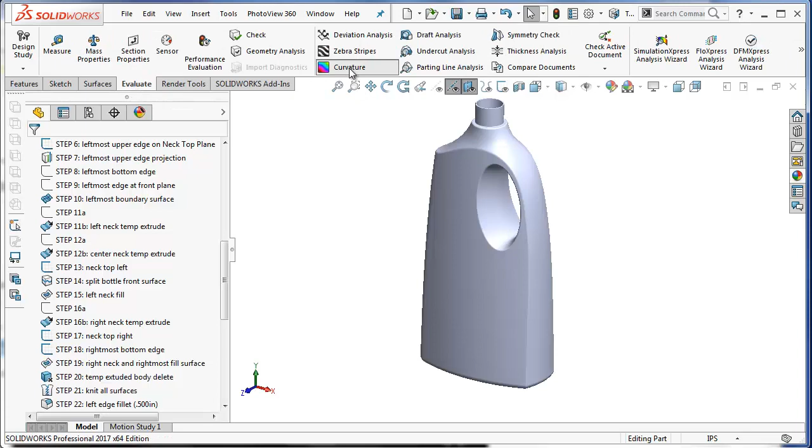I will just briefly turn off all of the edges and turn on my curvature. We can see everything is smoothly blending together. The only abrupt changes in color is where a fillet was added.

And if I turn on my zebra stripes, I can also see that I get good blending between each half of the bottle.

That's it for this tutorial. If you do not have access to the starter files that I used to make this bottle, what I'll do now is just have some stills that show the different sketches that I utilized.

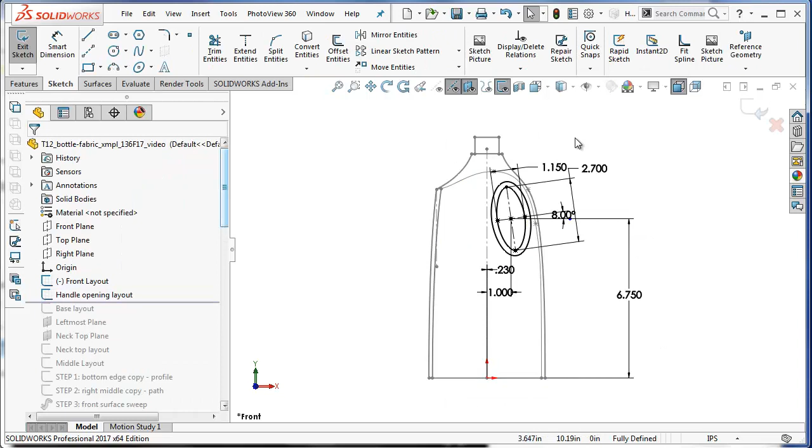Front layout, handle layout, base layout, neck layout, and finally the middle layout, which is located on the right plane.